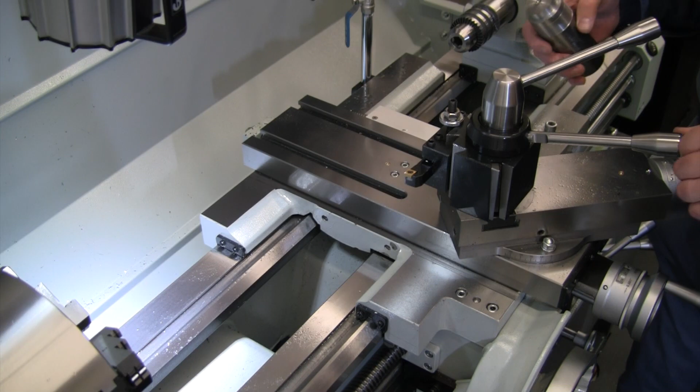All right, let's head over to the lathe and let's get digging into this project. So first off, let's take a look at where this is going to go. If I set this right down here on the ways, that's going to get to any of the tools I have on my quick change tool post. I'm able to back this up far enough even if I have a tool on here the other way that sticks out a little bit, and I've got plenty of room to check the height just by moving my cross feed back and forth.

And for boring bars, they're going to be over the other way, so if I move over this way with a boring bar, I'll be able to get in there and check the height on a boring bar as well. I know I've seen lots of different designs - some people put a bar across the carriage to set this anywhere in between, but I think I can get to everything I need by putting it down directly on those ways, which just eliminates one extra piece.

But as I mentioned, putting some hardened 4140 on and off of there, I don't want to do that. That's why we're going to go ahead and put an aluminum bottom on this. So it's actually going to be a piece of aluminum that's going on there, and it's 2-inch and it's hanging off the back there quite a bit - pretty good overhang.

So that's why we're going to cut a notch out so that it fits over top of the carriage and we get a little bit more surface area right on top of the way. So that is the overall design.

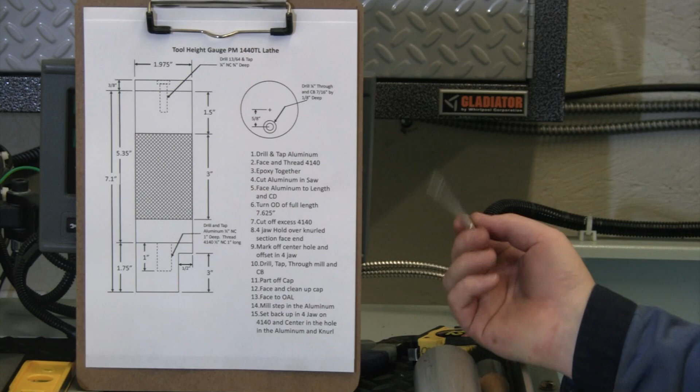Let me spin the camera around. Let's take a look at the drawing and talk through our order of operations and how I think this is going to come together. Alright, so here's a better look at the project and what we're going to put together.

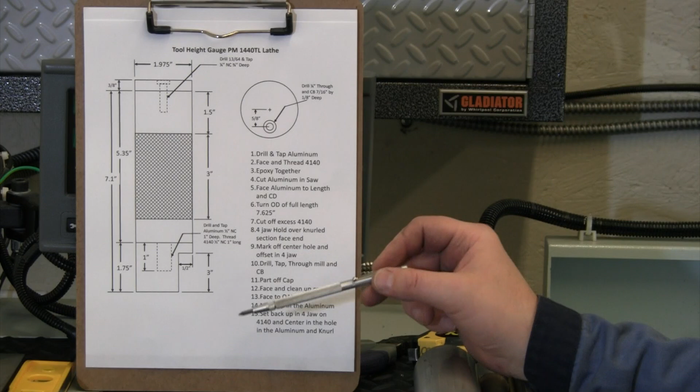I mentioned order of operations, and I did try to put together my order of operations for a couple of reasons. I didn't want to end up with a center drill mark in the top of my cap or the top of my piece, and I did not want to have to grab onto this knurl portion. Even with shims or anything else, it's still going to put some squish on your knurl and interfere with that, push that down. So I tried to make sure I had an order of operations where I wouldn't have to do those things, where I wouldn't be grabbing that knurl in the vise.

So I saved the knurling for last. I've got my center drill hole down here at the end. So here's what we're putting together.

We're basically taking a piece of this 4140, this 2-inch 4140. That's what's going to take up our main body and make the cap. We're going to marry that up with a piece of this 2-inch aluminum. So we're going to have a 1 3/4 inch piece of aluminum on the bottom here.

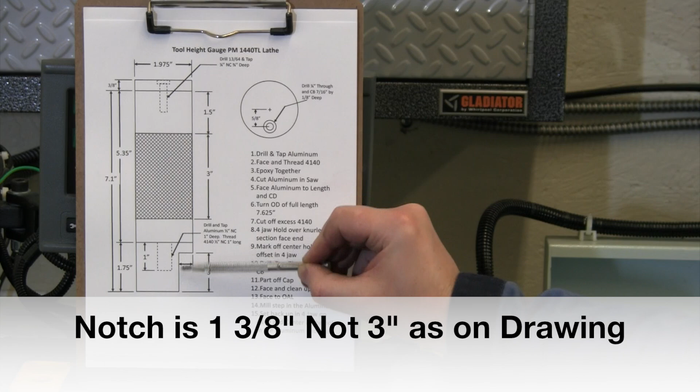We have to cut the notch out of that so that it fits around the carriage a little bit and sits nicely right there on the ways. Overall height on those two pieces should be right at about 7.1 inches. That's what I've roughly measured it.

Once I get this 3-jaw chuck off, but when we're transitioning to the 4-jaw, then I will put in the dead center into the headstock and we'll take a more accurate reading and make sure that we have the exact measurement on that one.

So what we're going to do is drill and tap this piece of aluminum, 1/2 inch coarse. I'm actually just going to turn it down on the 4140 and thread that for the 1/2 inch to go together. But I'm going to epoxy these pieces together solid. So this is not going to be height adjustable.

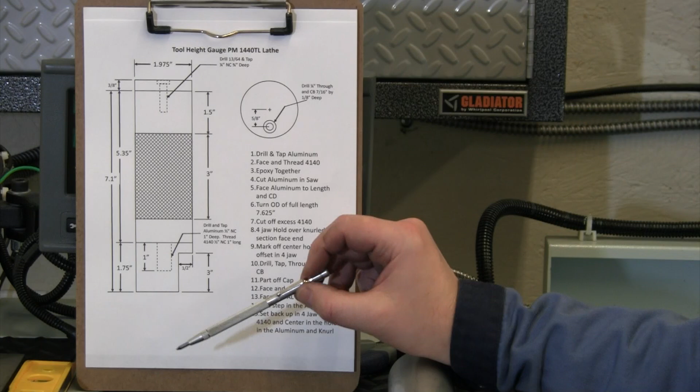I've seen some other ones where they are height adjustable. I plan to only use this on this lathe, so it's not going to be height adjustable here. It's a one-shot deal. We're going to need to make sure we face it to the correct length the first time, or we'll be getting creative with putting a spacer or something on it if we mess that part up. So hopefully we don't do that, hopefully we get it right the first time around.

So we'll go through an order. We're going to drill and tap the piece of aluminum. We're going to face and turn down the thread on this piece of 4140. It's kind of a long piece. Then we're going to lock these two together and epoxy them together.

Once that epoxy has set, then we will cut this piece of aluminum in the saw. We'll cut off most of that. We will face that and center drill it. Then we're going to pull it all out of the chuck, and we're going to turn the full OD on this. So that's going to be turning the OD of the aluminum, the 4140 body, and the cap, and the material we're going to need in there to part it off and clean all that up.

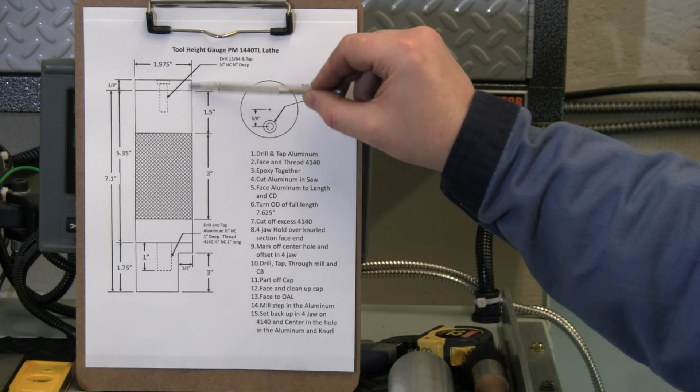So that's going to be a total of 7 5/8 we're going to turn for the OD. Then we will go out in the saw. We'll cut off the excess 4140 that we were holding on to turn that.

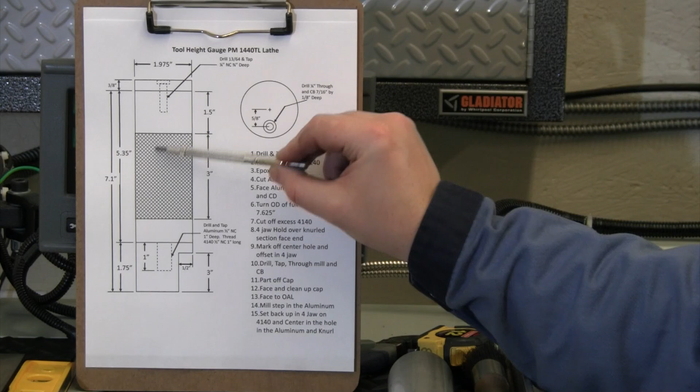At that point, we're going to grab it in our four-jaw, and we're going to grab in this area that we're going to knurl right here, because then we don't even need to use shims. Any marks we put on there, the knurling should take care of that afterwards. So we'll grab that in the four-jaw, and we're going to face off this end.

And then we're going to mark that off-center hole, which is this one right here. This is where we're going to get kind of fun. We're going to use the four-jaw, we're going to dial that in, and we're going to use a dead center to hold into our punch mark to dial that, to get that accurately offset.

And then we're going to drill that, tap it, use a couple of end mills to go in there and put the through 1/4 inch hole, and then put our 7/16 counter bore in that. So we'll get all those operations done on the cap, and then we will dial it back into zero again, and then we will part that off.

After we have that parted off, then we will face this to our accurate length, and we'll clean up the backside of this cap, and face that off. And at that point, then we will take it over to the mill.

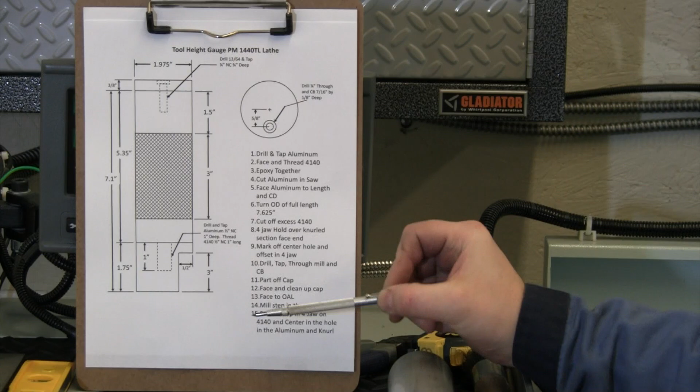So we still haven't knurled it yet. We can grab this whole piece in the mill. We'll mill out this notch down here, and then our last step, we'll bring it back to the lathe.

And we will use shims, then we'll be grabbing down here at this end. We will put some shims to make sure that we're not putting any marks on it. We've got our center drill down here, and then we will knurl that 3-inch piece in the middle.

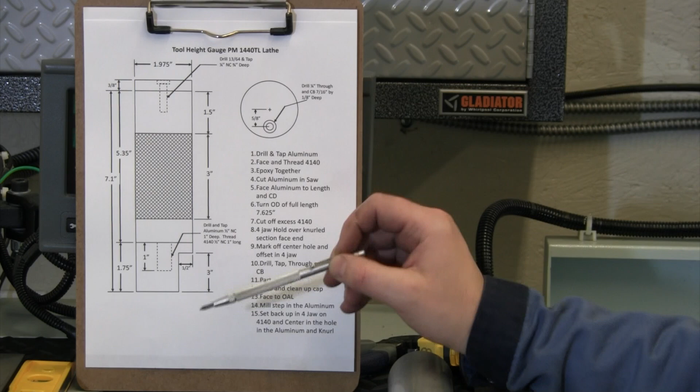I just have the knurling tool that came with my CXA tool set. I have put some new knurls on it, but still, it's not a quality knurling tool by any means. So if we don't have good luck knurling this the first time, if it doesn't look good, then hey, we're going to just machine that down, and it'll just be like a necked-in hourglass figure, like we did it on purpose, until we get a good looking knurl in there.

So that's the beauty, the fun part about making parts that don't have critical sizes to them is, if it doesn't turn out exactly perfect the first time, you get to add some artistic interpretation and make it look the way that you want to.

So really the only critical size we need to hit on this is the overall length, since it is a height adjustment gauge. We want to hit that. Most of these other dimensions on here, we're just going to make sure we get them looking good and looking the way we want to.

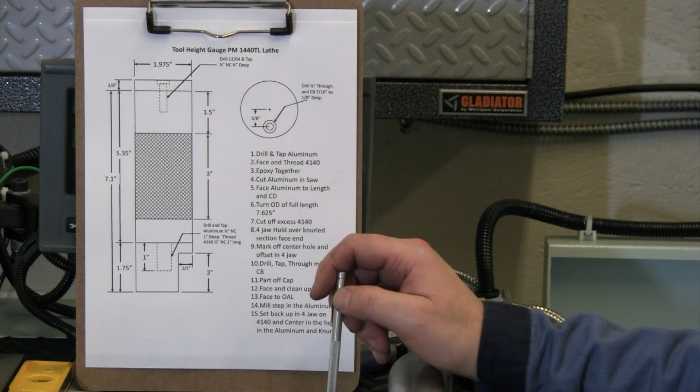So that's our overall order of operations, to make sure we minimize where our extra marks are and make sure we're taking care of the surface finishes. Just because it's a cosmetic part, that's really all it is, and we're going to try to make it look as good as we can.

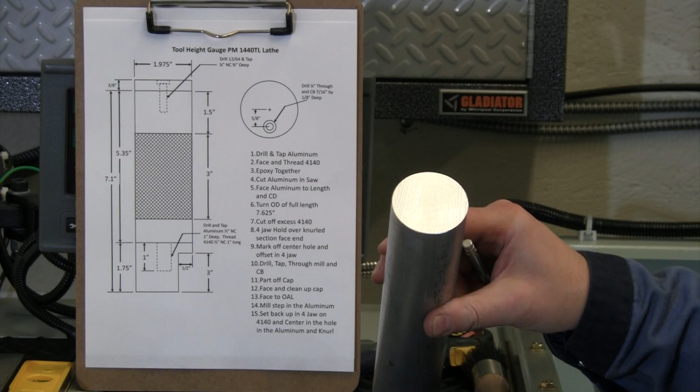So that's the thought. All right, let's go ahead and get lined up in the lathe, and let's get this piece of aluminum in there, and let's get this drilled and tapped for step number 1.

Alright, tap drill size for 1/2 inch coarse, 27/64. We'll get that pushed in there. We're going for 1 inch deep overall, so I'm going to go just a little more than 1 inch.

We'll probably end up not quite putting a full inch of thread on our other piece to get that together. We'll drill just a little over 1 inch deep, and we'll tap as deep as we can.

And here's my tap handle from Northern Machining Incorporated up in New Jersey. So it's nice, it's got a little cam lock on the back, so it self-centers your tap in there. And then after you get that centered, you still can tighten up your other pieces here to lock that in. And we've got a bearing on the back side of that.

So we're going to grab that bearing in our chuck, and that's going to allow me to spin the tap with both hands. It makes it a little bit easier to get in there and hand tap this hole.

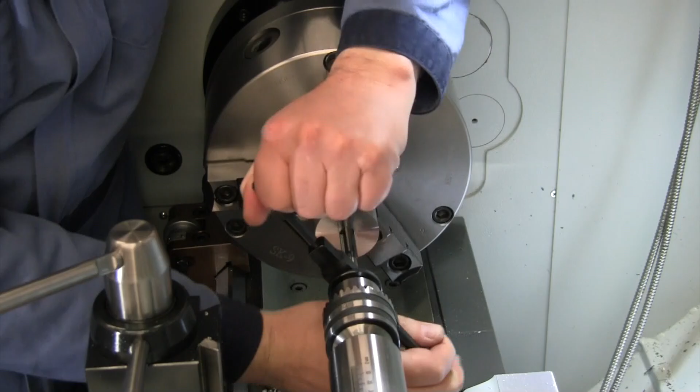Makes it really nice for hand tapping a hole. Alright, we're running into some chips in there. Pull it out, get some air on it, get it out of here, and we'll finish hand tapping it in the vise over there, because that's it.

That's all we're doing for this step, was we just needed to tap that hole. And we can run our tap back down there in the vise and just make sure we're in there as deep as we can. And then we're going to run some threaded rod in there to find out how deep we're going to have actual threads, and then we'll know how far to thread our other mating piece.

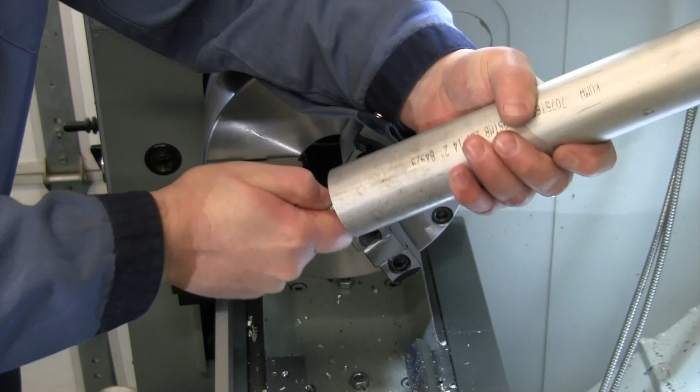Okay, I put it in the vise. I got an extra couple of turns out of the tap. So we got that cleaned out. I put some air to it. We've blown that out. Let's see how far we are getting our rod down in there.

All right, so right about where that ends. So that's our line right there. So we've only got about 3/4 of an inch of thread that we're gonna get down in there, unless we bevel our end on ours a little bit more. So we're looking at about 3/4 of an inch is what we can go for as we thread our other piece. We'll get our mating piece in here.

All right, we're turning this one at about 750 RPM on this 4140. We've got enough sticking out. We're gonna machine that back to 1/2 inch, go back 3/4 of an inch down to 1/2 inch diameter, and we're gonna cut our thread on there.

I know I cut one the other day. Originally, I was gonna use a piece of threaded rod between these two parts, so I was just gonna drill and tap this. But then I thought, what the heck, we can go ahead and do that. I know that I can turn up to a pretty tight shoulder. I'll get in there and notch out the back side of that a little bit to make sure our pieces go right together, but there's no need to use threaded rod, or we can cut a 1/2 inch thread on that. So let's knock that out.

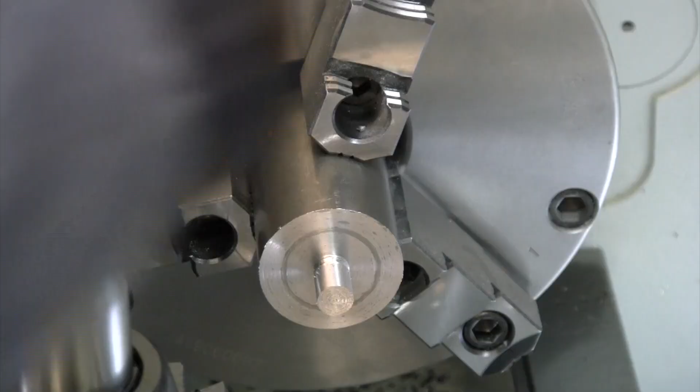Alright, so that's as close as I can get to get rid of that last little bit at the end of the shaft there before the thread. So we will just have to make sure we've got enough of a bevel on our piece of aluminum that it's going to go in there and go right up flush all the way in there.

Alright, let's get this set up to thread 13 threads per inch. I'm going to spin that at 130 RPM, and we're going to stop in that little groove right there. 13 threads, we're going almost right at 100 thou deep, and on my outside diameter, this is pretty much cooled down now. We should be just 2 or 3 under. We're only 1 under. It's all right, we'll hit it with some emery cloth as we get some threads on there. Or I'll just knock that down with the emery cloth a little bit right now, and then we'll get that threaded.

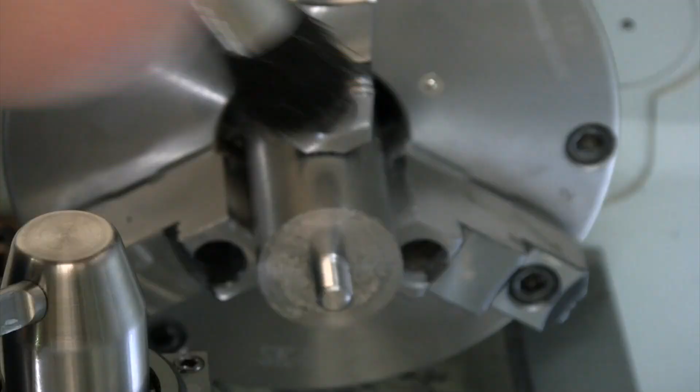Nice snug fit, that's what we're looking for. Let's make sure this is going to fit together for us and spin all the way up there flush. And yes, we are on there tight and flush. Alright, let's get these out of here.

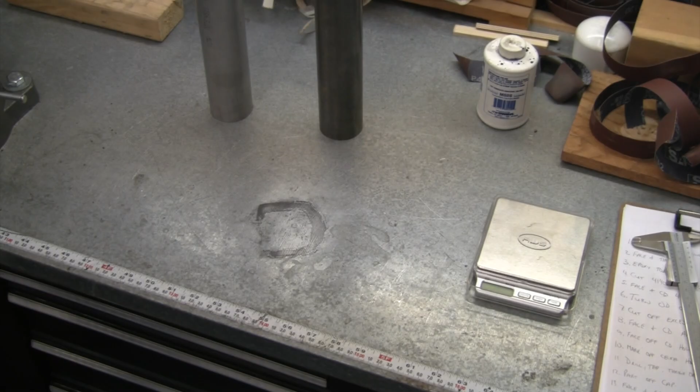Let's get some epoxy mixed up. We'll get some acetone on these, get these all cleaned up, and let's get these two parts epoxied together. I could probably just use Loctite on this, but hey, I want something permanent. I do not want these pieces coming apart. So we're going to go ahead and mix up some epoxy. This is 24-hour epoxy, so this will be the last thing we do tonight.

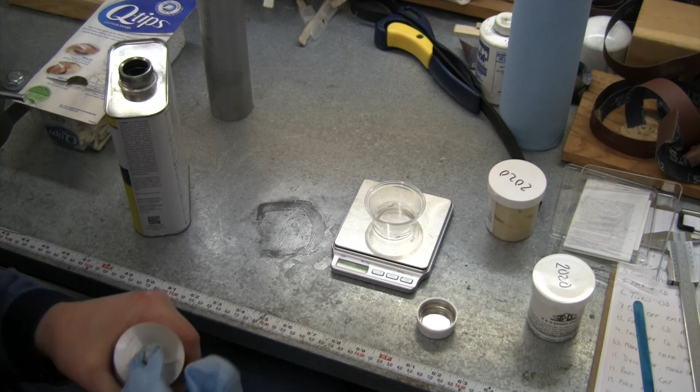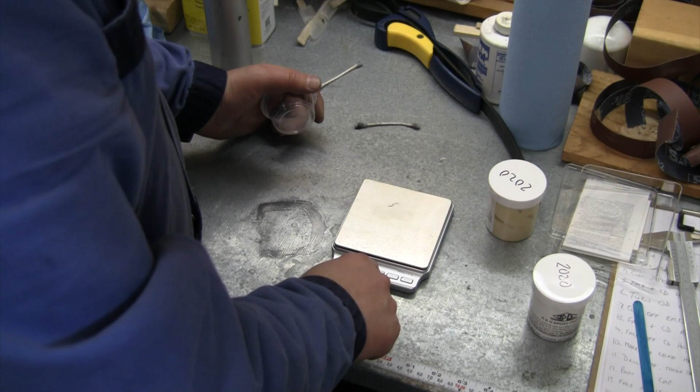But first, let's get our parts cleaned with some acetone. Make sure we have all of our cutting oil, everything off of these parts. There we go, our part should be nice and clean, and by the time we get our epoxy mixed up, all that acetone will have evaporated out of there. So I'm going to get one part mounted in the vise here, and let's get our epoxy mixed up. Again, I do epoxy by weight, that way you're not trying to eyeball mixing up your two parts, just a lot easier to do it that way.

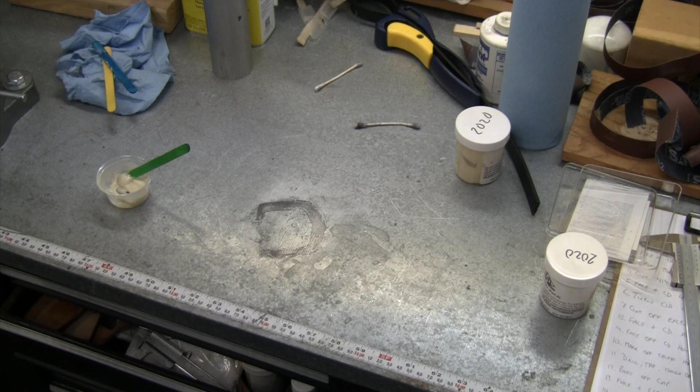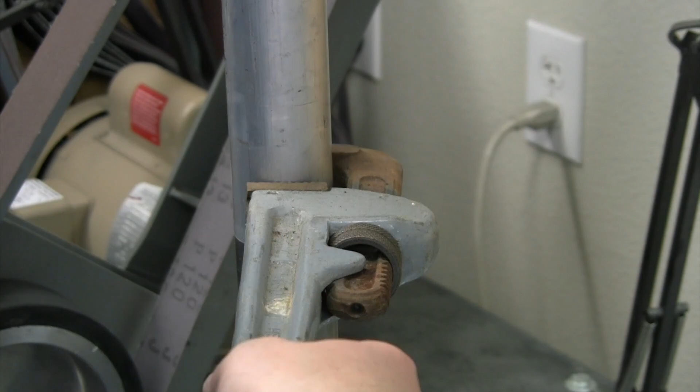Alright, let me get the camera turned around, let's get this epoxied together. There, we got that nice and tight there now. Let that cure till tomorrow. We'll come back and we will get to work on our next step. That's it for tonight. We'll see you tomorrow.

Alright, our piece is epoxied together, and that is ready to get machined, cleaned up. So now next step, we're going to take this out to the saw. We're going to cut this down to length. Grab a hold of this in the lathe, face this end off, get that to pretty much our 1 3/4 inch length, as well as we can measure it up to that shoulder. So we'll get that faced off, and then we'll center drill it, and then once we have that done, we'll take it out, and then we're going to cut off our other end here to length. We need to make sure we're leaving all the length that we need on that.

We'll get that cut off, and then we're going to get that back in the lathe. We'll face that off enough to clean it up. We'll mark our off-center bore, and we'll start working through the steps that way. Let's get this in the saw, get it cut off, faced off in the lathe, and then we'll pick up on the next step.

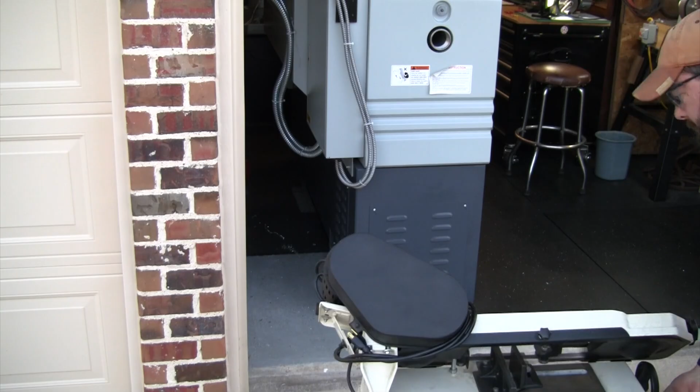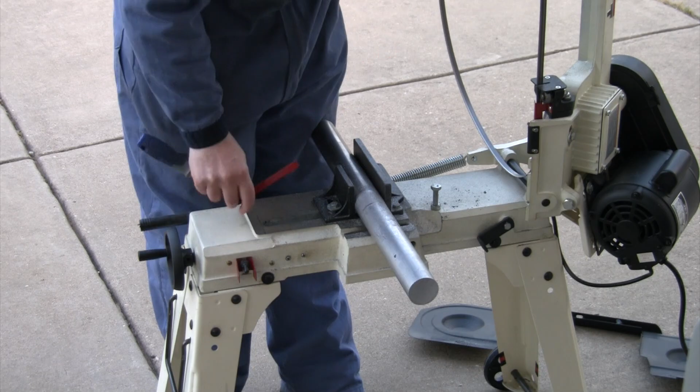Yeah, when it's taking an hour to cut aluminum, it's time to change the blade. Look at that sucker go now.

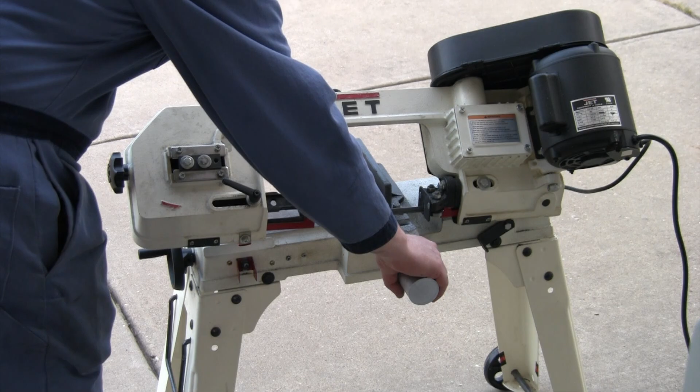Alright, we're looking at almost 93 thou to come off of there. Let's get that faced off and then we'll check. Also, it's a good thing we write down our order of operations, because we're going to face this off and then turn the OD on the whole length. So we got to do all that before we turn it around and cut that 4140 to length. So face this off, center drill it, and then we're going to pull that out and turn down our full 7.5 inches or so that we're going to need total. And then we'll pull it out and start working on that cap end after that.

So about 45 thou to go. It cuts nice on a heavy cut, so we're just going to take all of that at one time. The overall length was where it's going to be critical. Getting this, the 1 3/4 was just kind of a made up size, so that'll be perfect. Now we'll get that center drilled.

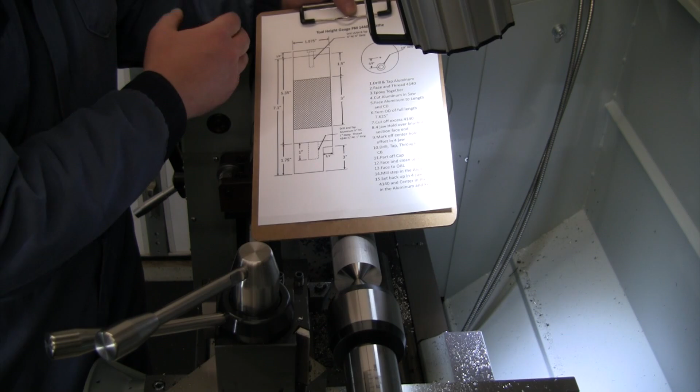Okay, we're turning 7 5/8, somewhere right around there. The reason we're going 7 5/8 is because we have our 1 3/4 here. Let's get our picture. We've got the 1 3/4 for the aluminum, we've got 5.35 for our finished 4140, we've got the 3/8 on top, and we're going to have to part that off right there to separate the cap, and we need a little bit of room at the end to face it off. So that's why we're going with our 7.1 plus 3/8 plus 1/8 of an inch to part plus a little bit of room. So that's where I came up with the 7 5/8, just to make sure we have enough, so we don't run out of material.

So that's our 7 5/8. So we're going to turn that back. Again, we're not hitting a specific size. It's currently 2 inches. I think if I take a 30 thou cut off of there, that's going to be enough to get a decent finish on this at a good speed. Got a pretty decent rate of feed, so I just want to take one pass off of that so it cleans up nicely and we get a good finish. I think that's a pretty fresh insert on there still. So that's the goal: take one 30 thou pass, clean everything up, get a nice finish, and then we are ready to move on to our next step.

So I'm going to turn this at, normally I'm turning this at 750 for this 2-inch 4140, but since I'm only taking one cut at 30 thou, a little lighter than normal, I'm going to go ahead and turn it at 900. Should be a good compromise between the aluminum and the 4140, and I'm feeding at 7 thou per revolution, so with that fresh insert on there, that should give me a nice decent finish. That's the goal. Let's give her a shot.

That gave us a nice respectable finish across there. We're going to put a knurl for that 3-inch chunk in the middle, so that's going to change that up some too, but yes, that looks good. Let's put a bevel on there and let's get this out of here. I think that turned out all right. Looks kind of cool, that transition from the aluminum there to the 4140. That should be a good looking part when we're done.

Alright, let's get this back out in the bandsaw and let's cut off the rest of that 4140. Now that we've got a nice sharp blade on that bandsaw, should make short work of getting rid of that, so that should be good.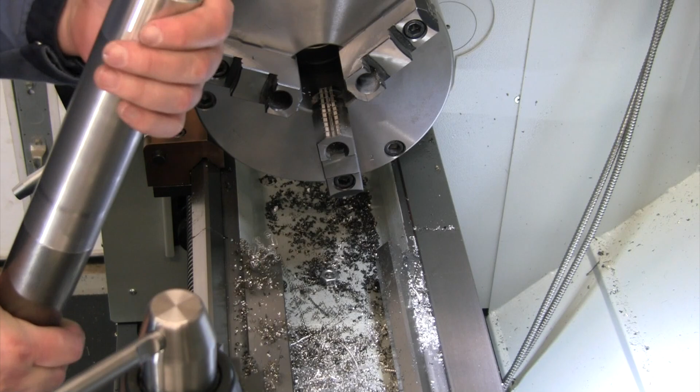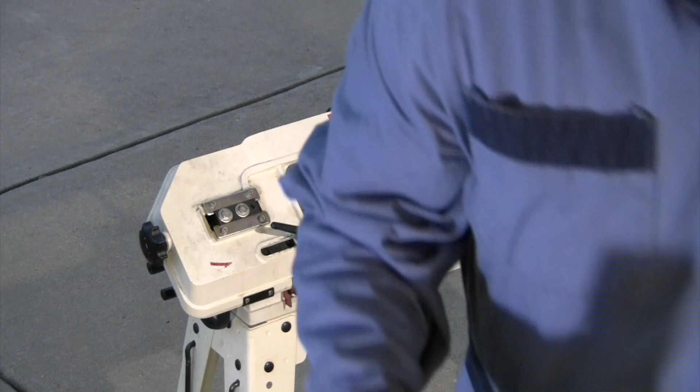There it is. Alright, let's get this cleaned up a little bit. Get that 3-jaw chuck off of there. Let's get a good measurement of exactly where our center line is off of these ways. So we'll get a good measurement off of that with putting in our adapter sleeve and put in a dead center. And then we'll get our 4-jaw on and we can continue on with this process of making our cover plate and get that parted off.

Well, there we go. That's going to give us our accurate height measurement. I'm not going to be able to measure down to the ways, of course. My plan is I'm going to lock in one of these big flat carbides, get this lined up on center, then come over with my vernier and measure down, and that'll be what we go with. A dial across some measuring blocks would probably get me closer, but for what we're looking for here, this will accomplish it.

All right, I'm liking that. I am getting right at 180 millimeters. I'm sure 180 millimeters is what it is.

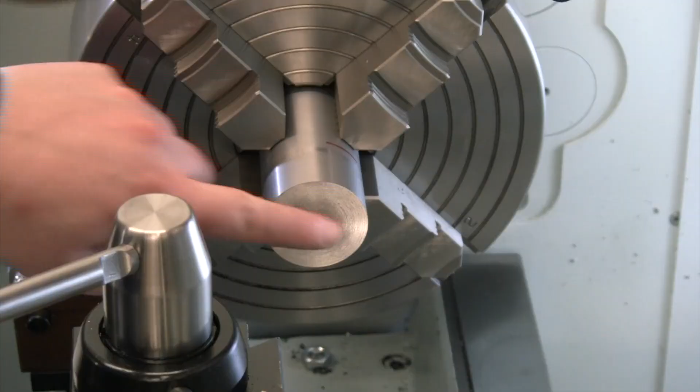Rub a little emery on that. That's going to be our finished top of the cap once we're done. There we go, now all that dialing just to take that one little cut. Now we're going to pull that out of there and we are going to barely take that edge off of that as well, so we'll be measuring out to that.

All right, so we're going to pull that back out and mark our offset hole. We're coming 5/8 off the center, so we just need to be 5/8 off that center line. Then we're going to dial in that hole using a dead center, and we'll come back and do that here in a minute. We're going to dial this offset so that we can drill, tap, and counterbore that hole all through both pieces. Then we'll come back, dial it back in, and part that piece off. We should have a cap that's going to match up and fit nicely on there when it's all done. And then we'll do our precision cut, which is facing that to length.

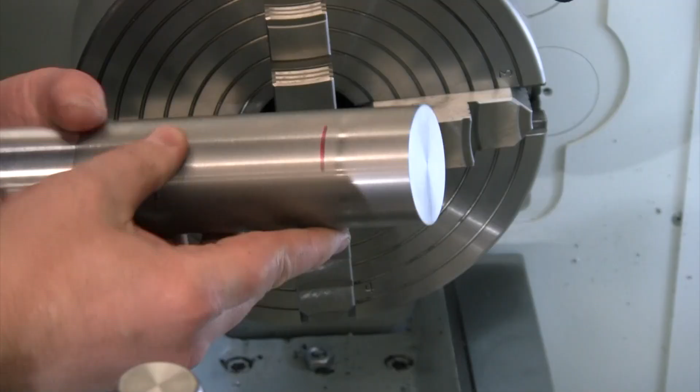So let's get this back out of here and get our hole marked. Yeah, not too bad for jaw marks at all. Definitely our knurling is going to get rid of anything we do there, so that'll be fine. All right, let's go over to the bench and mark our hole on here.

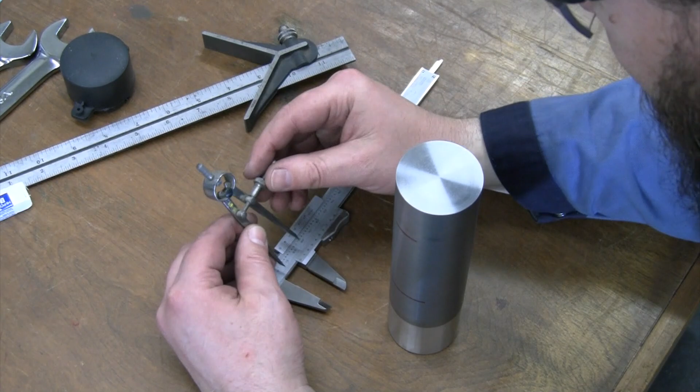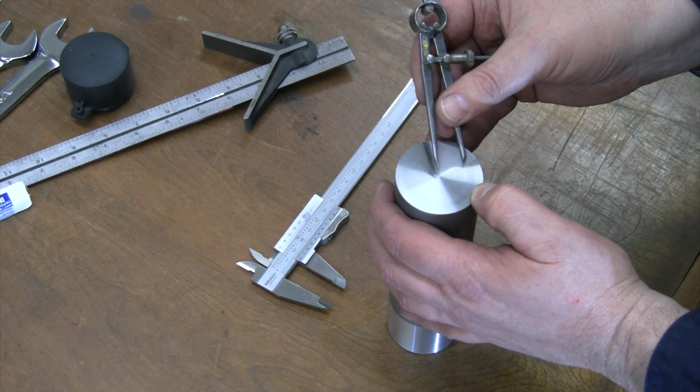All right, I want to measure, making sure I'm measuring more or less a straight line. It's only one hole, so we shouldn't be able to get too far off track here. I'm going to set these for 5/8, and I'm going to use those to set my dividers. We're going to measure off of that center mark right there, and yes, I can see my mark right there. There we go, see it better if I do it that way. Perfect, love this bullseye center punch from Grizzly.

And there we have our punch mark in there. Double check that. Yes, there we go, right back to the center. So we're 5/8 off center. Now we're going to go dial that in on the lathe and get that drilled.

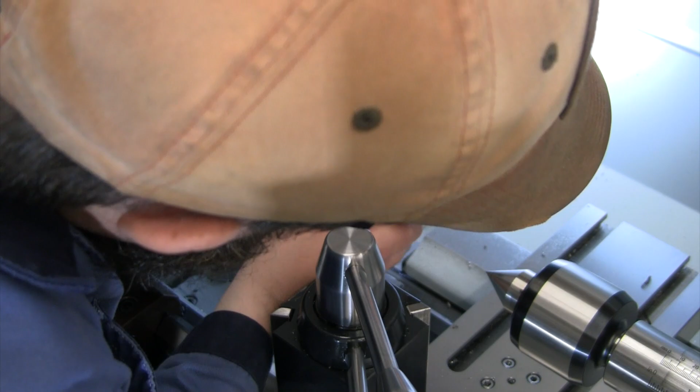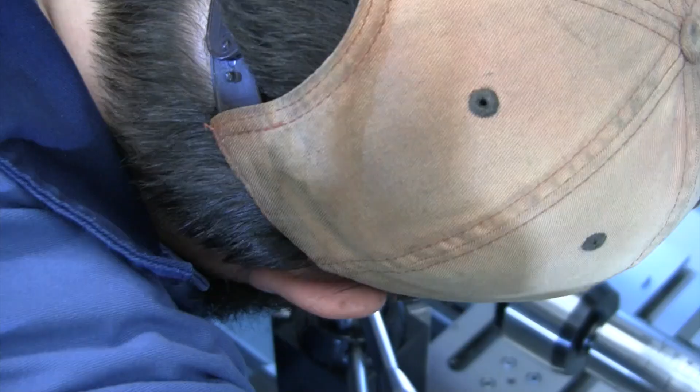All right, well first we're going to try and make things a little bit easy for ourselves in that we are going to back one of these jaws off, 125 thou. And that'll give us our... except I need to go 625 thou, so I'm not sure what I was thinking there. It's 625, it should give us a reasonable starting point. So I need to line up my piece 180 to that. Now I'm so spoiled on this lathe with everything going straight through the spindle that I was kind of thinking that was going to happen. I was forgetting that once this is offset, I'm not going to be able to make it through the spindle anymore, so that's not going to happen, which means we're going to want to put some shims in there so we don't mark up our aluminum all over the place here.

All right, let's kind of hold that there while I put some shims under it, and then we'll see where we are. Well, let's see how this is going to work.

All right, we're within a couple thou there. Let's see how we are doing for having it straight in the chuck. We're actually only off by maybe just right around 2 thou. Let me grab a brass punch here. That moved a little bit that time. All right, we're off about 1 thou. I think that is going to be fine. Let's finish getting this dialed in for us here.

Okay, sometimes you just gotta say good enough. We're drilling a hole and tapping it. We're 2 thou on run out, 2 thou for being straight. Actually, we're only about 1.5 thou or so on run out. I think that is close enough for our drilled and tapped hole.

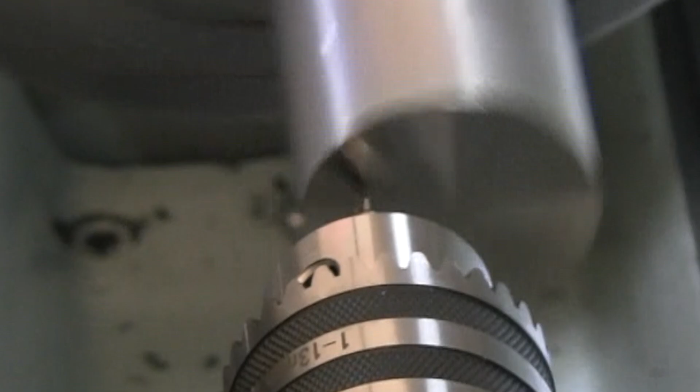So let's go ahead and get that done. Let's see how it looks when we turn it on. All right, we're gonna turn it relatively slow here, so 250 RPM. And our center spot is turning right where we want it. That is almost hard to look at, you know, but that's all right. That is working. Get our hole drilled in there.

All right, so we're going to drill our tap drill size in there first. And since this got a little long for our cap and everything, let's figure out how deep we need to drill in here. So I'm going to end up at 7.1, and I want to be drilled and tapped in there 3/4 of an inch from there.

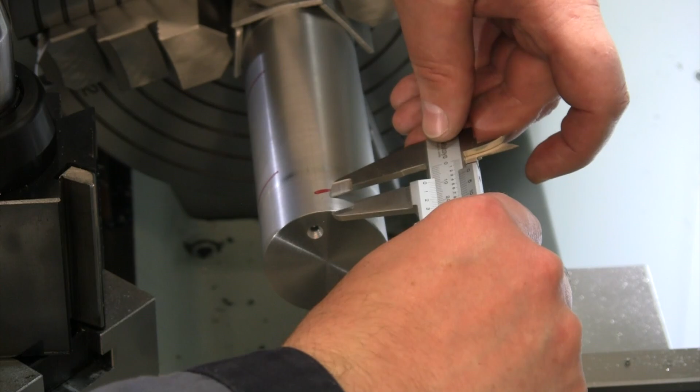I'm not going to have too much to face off of there, that's for sure. Well, I guess there's a lot more there than I think. I'm only going for 375 for the cap. So yes, I'm going for 375. So we're going to face some off of that, and that's still going to leave us with enough to part and enough to face off when we're done. So, okay, we have plenty of material.

We're doing fine there. Bevel off those marks I made with my brass hammer there. All right, so from here, if I want to be 3/4 of an inch deep, I need to drill in roughly. I want to be able to tap 3/4, so we're in about 1.5 inches.

Whew, that is interesting watching that go around. All right, now I need that to be all the way through 1/4 of an inch, or I need it to be 1/4 of an inch hole all the way through the full 3/8 deep.

All right, we've got room, so I'm going to do everything that I do here. I'm going to go an extra 50 thou, because then I'm going to be able to take 50 thou off of the end here, get rid of any of the marks that I made. So I need to go in 3/8 plus another 50, and I can go a little extra because it's just where it's going to get parted off.

All right, so there's 425 deep with my 1/4 inch. Then I need to counterbore that 7/16 of an inch. I'm going 1/8 deep with this. I need to go that extra 50, so I'm going to go 175.

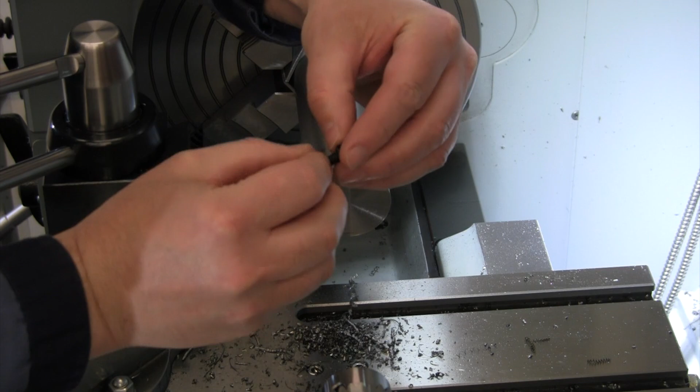I would say that worked all right for you. Every once in a while you just get lucky in that we made this a little over 1/8 of an inch deep, and it is actually supposed to be 1/4 of an inch deep. So 1/8 of an inch is only the head of this screw, and when you put the head and the washer together, it's 1/4 of an inch deep. I wrote that down wrong on my drawing, just measuring the head. Thankfully I hadn't taken this out of here last night, so it slept on it and it's still in here and set up.

So we're going to go ahead and punch that another 1/8 of an inch deeper. Now that we know a little extra feed on that end mill, it doesn't want to chatter, it cuts pretty decent, we should be able to do that fairly quickly. So we're going to do that.

Also, before we take this out of here, just thinking about the setup and why we were having such a challenge dialing that in with that dead center. If you look in here at how this is set up on the chuck, we've got two of these jaws so far down on the back side of our piece that it really just didn't want to move over. So just a little bit more complicated than normally dialing in a 4-jaw chuck, and I really had to loosen these two off in order to get it to move and get it lined up across, in this case, jaws 1 and 3, a lot better.

And then even as I tightened 2 and 4, it wanted to sort of push it that way a little bit. So this much offset gives a little bit of different challenges, but other than that, it really dialed in exactly the same as any other time dialing in the 4-jaw. And we still got it within 2 thou and 2 thou across the length, so for the hole that we're making, still plenty accurate on there. Kind of a fun way to dial something in.

So if you ever need to make an off-center bore, anything sort of cam related, using that dead center like that is a great way to dial that in.

All right, well, let's get this turned back on. Let's punch that counterbore in there 1/8 of an inch deeper, and then we are going to move this back, face that, part this off, clean up our end a little bit, pull it out, measure it, get it in there, and get it totally faced to length. We'll be ready to mill our notch on the end, and we are getting close to wrapping this up. Let's keep moving through our steps.

Yeah, we're a little deeper than we needed to be. But we're going to face some off of that when we turn this around, get rid of that mark we made. So we'll get that faced back to 1/4 of an inch deep. And then we'll get that parted off.

Shims worked well. Not a mark on it. All right, let's get it pushed back in where it's going to be on top of our knurl marks.

That is good enough to face this off. All right, we're going to face this off at a nice fast feed, try and get a good finish on there. And we're taking 50 thou. I'm going to take that all in one cut, nice heavy cut, seems to clean up a little better on this. So let's take all of that at once. Yes, even across that hole. That nice heavy feed gave us a good finish there.

Okay, let's put a nice bevel on that. That's got that looking pretty.

0.375 plus 0.086, we're going 461. I'm going to leave myself a little bit so we can face about 20 thou off the back side of this. We're going to grab that and make sure we clean that up a little bit as well. That should give me enough to face that off right there. Now we're going to be facing through that hole, so it's going to go a little clunky on us, but I think it should still face off just fine.

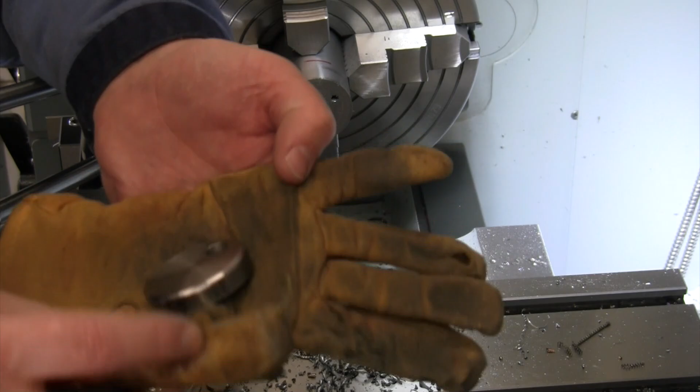Well, we'll get that back in there in a minute, face that off and clean it up, but there is our nice looking cap—counterbored, drilled through, ready for the screw to go in. We just need to clean up the backside a little bit.

All right, let's measure our length on this. I'm going to go get my calipers. We'll measure the length and then come back and face this off to our finished length of 7.087 inches, 180 millimeters.

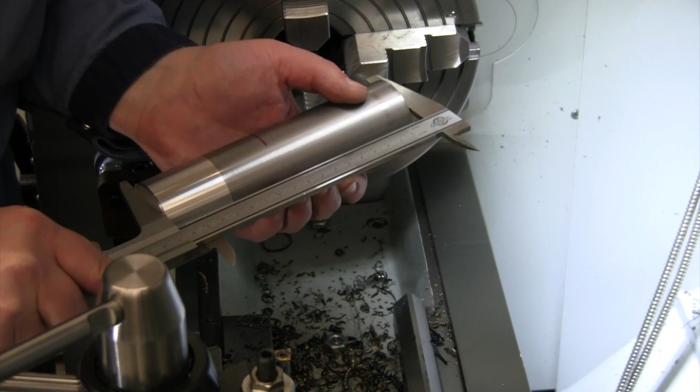We are almost exactly 1 millimeter long, so we're going to calculate exactly what a millimeter is. On the inch vernier, let me get the light over here so I can really see. On the metric side, I'm right at 181 millimeters, and on the inch side I'm at about 7.124.

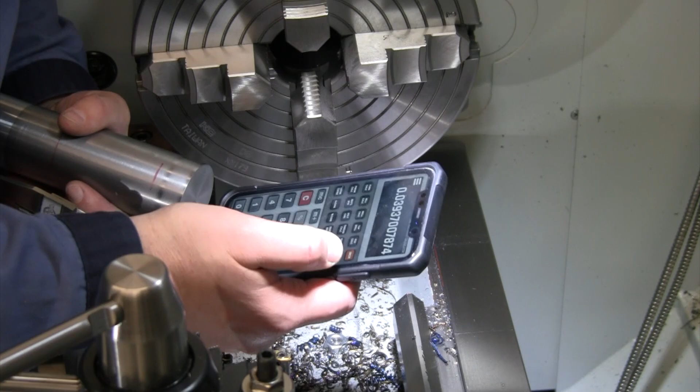Let's see what 1 millimeter calculates out to: 0.039. And if I'm at 0.124 minus 0.087, that's 37 thou, and 1 millimeter in inches is 39. So that's within 2 thou. One reading tells us we need to take off 39 thou, the other says 37. We're going to split the difference on what I'm getting off those two scales on the caliper, and take 38 thousandths of an inch off this, and we'll be done.

Yeah, we didn't leave a whole lot of extra to spare, did we? Not a whole lot. All right, well that's good. Let's get this in here, we'll take off our 38 thou, doing that in one nice heavy cut to try to get a good finish on it, and we'll be ready to take it over to the mill. Then we'll bring it back over here just to get it knurled.

We're doing this one-shot deal. I did one touch off, zeroed it, and now I'm just making sure that's good. Right now I'm at 1 thou and still not touching, so I know I'm within 1 thou. Perfect. All right, I got within 2 tenths, and when I got within 2 tenths, I was just barely touching. So now I know I've got a nice, good touch off.

We're going to go our 38 thou in and take our cut, and we'll have this set to length, and that'll be our part done and ready to go. We're just barely going to break the edge on this, because this is what we're lining up our tool bit to, so we don't want to put a big heavy bevel on it—that would make it harder to line up with our tool. So I'm just barely going to touch it with some emery cloth, make sure there's nothing sharp, but not put a big bevel on this one.

That cap's going to be on there to keep that covered up. And there we go. All right, I'm going to be grabbing onto this end when we knurl it, so I'm going to go ahead and polish that up a little bit right now while we've got it here. And that should be it. We'll head over to the mill and get that step cut in there, but first we'll get this cap machined off on the backside and get it finished up and ready.

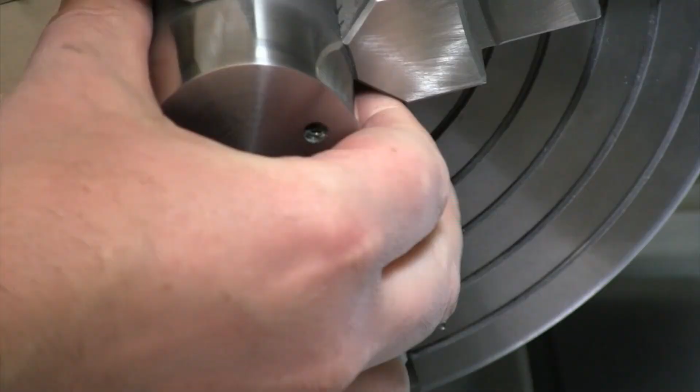Great tool for the job here.

Alright, well a little bit of it's the rough surface from our parting tool, so we'll call that good. All right, same thing, we're going to take about 25 thou off this. Let's clean that up a little bit. And just like the other one, we're just going to break that corner with some emery cloth, and we'll leave that a nice sharp edge to go up against checking our tools.

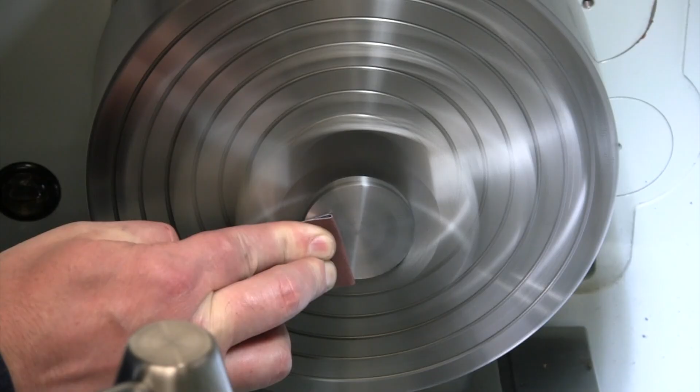And there we go, that is done—deburred, drilled, counterbored. The screw head is going to drop down in there nicely. We'll get that onto our other piece. Just give it a quick rub, just to barely see a little bit of jaw marks in there. We can rub those out a little bit by hand, I think, and we'll have those all set.

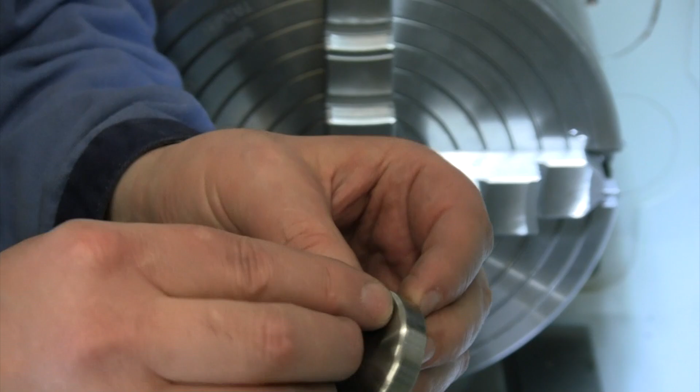Something we want to think about before going over to the mill: when this is notched out, I want the cap to swing from over here so that when I'm on this side I've got good access to the edge of my piece with the cap swung out of the way. If I've got a boring bar, I can get over here, and if I'm coming in from this side, I can get over here. So when we put this in the mill, we want it oriented that way, which means we're looking to get rid of material right here. That's going to be set up in the mill, right at 90 degrees, is where we want to try to get that hole set up. So make sure we make note of that.

We also need to finish tapping this hole down in there the rest of the way. So let's go over to the vise and finish tapping that really quick before we put this in the mill.

Gonna be close. Let's see if that got us in there far enough. We may have to shorten this screw a little bit, but between the washer and that, we'll see if it gave us enough. Let me blow some chips out of here and we'll make sure we bottom that out.

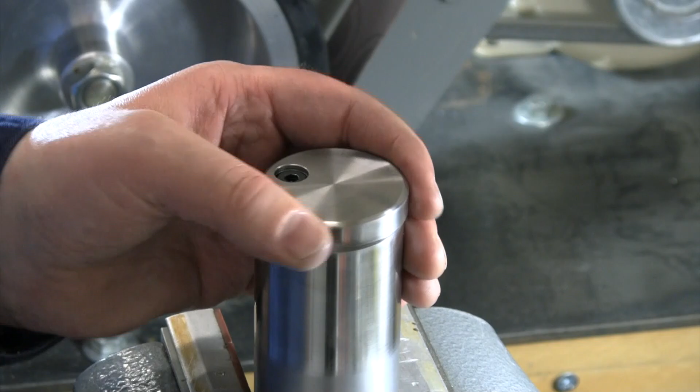There we go, they're machined together, so a beautiful fit on there. I've got a lock washer in there, so just enough to put a little bit of pressure on that - a really nice friction fit to spin it out of the way. We'll use that as our height gauge. I'm happy with that. Counter bore complete, lined up. Let's get this in the mill and get our flat cut on here.

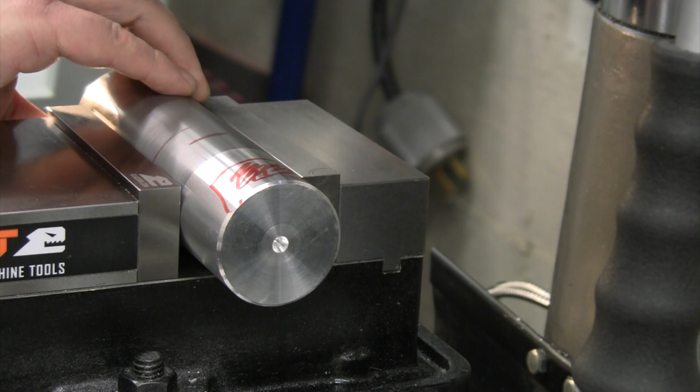All right, so we've got our red part marked off there where we want to cut. I want to get this hole on the backside here as close to 90 degrees as I can, so I'm going to put my level across the middle of the hole, middle of the piece. I think that's pretty good.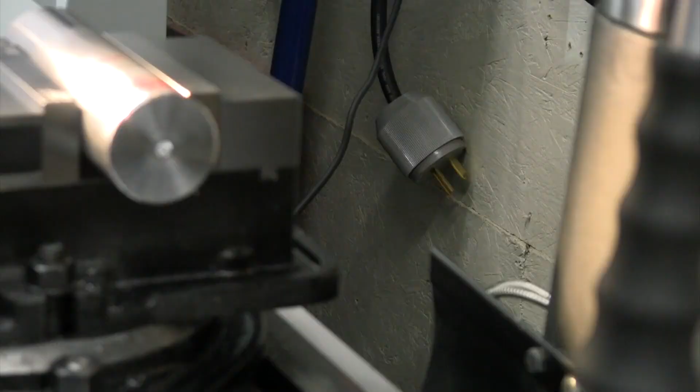I'm going to use a 5/8 insert indexible end mill to rough that out. We're going to go 1/2 inch deep and 1 3/8 of an inch back, roughing to within about 5 thou at the bottom and about 5 thou on the back. Then I'll change it out to a 3/8 end mill and go in and clean all that off to make it look nice and shiny and pretty. This is a Glacern Machine Tools indexible end mill - you can probably see I've got their vise on here too, but I've been very happy with some of their tooling. Really does a nice job.

All right, we're touched off there, so that's where we're going to start our 1/2 inch deep from. We'll do 2 cuts of 250 thou each. There's 250, let's touch off on the end so we'll know where we're going for our 1 3/8.

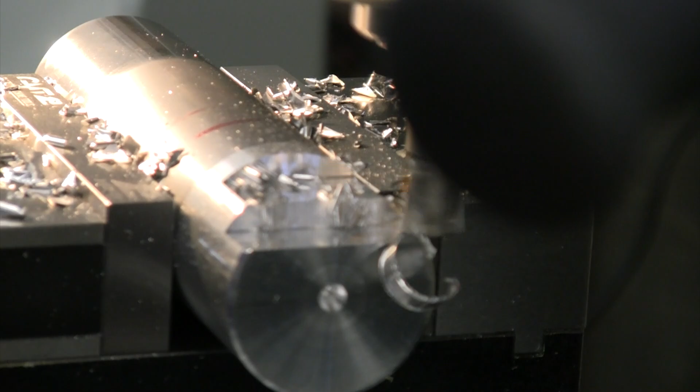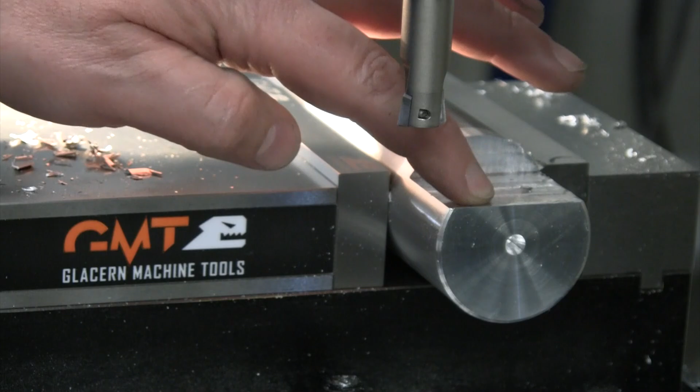Well, I think my handle got in the way on that last cut, might have cut some of it off. It's all right, we got that roughed out, you can see there's just a little bit of a step back there. So I'm going to put a 3/8 end mill on there and we'll go in and just take a skim - about 5 thou off the bottom and 5 thou off the back, just clean all of that up in there.

I'm going to go in there and touch off on depth. Because this end mill is 3/8 and my other one was 5/8, I just need to adjust it by 1/8 of an inch, and I should end up right back on my start point again. If I come over here to 125 and re-zero that, now I should be right flush on the end of this again. And if I spin that - yeah, I've got a little burr turned up on it, but yes, I spin that and I'm lined up right on the end. So now I know where to measure off for my 1 3/8 of an inch deep.

We'll touch off on the bottom, set a cut for about 5 thou deep, and then start working our way over in 350 thou increments, working our way across until we get right to our 1 3/8 depth back there. It's only a 5 thou cut, so I'm just going to cut it both ways coming across - not moving any backlash or anything for climb milling versus conventional milling, so we'll cut both directions. I'm actually going to start with a climb mill to try to get rid of this burr off the front edge, then go back and forth and zigzag our way across there.

And there it is, turned out nice. We got rid of that little step on the backside from that roughing end mill, and it worked out perfect. That last step was only 25 thou difference, so it looks like it steps over perfectly. We do have a burr on the front, so we'll just barely touch that with a file and clean it up.

Before we get this set up to knurl, let's see how we're looking so far. There's our step, we've got our flat on there, and that fits up nicely onto our ways. This is the tool bit we had out that we used to set this up. Let's see how we're coming across there. That's feeling very nice, looking good. I think what we designed is operational and that's working. We'll put our cap on there after.

We never did come back with our vernier caliper to double check our size. If I put that across there, yeah, that comes out looking right at 180 millimeters. As close as we can eyeball that on a vernier without an 8-inch mic to check it, that is what we were looking to create. So I'm happy with that, that's going to work.

Alright, let's get this set up for our knurling. We'll get this all dialed in first, and then we're going to knurl. This is just a really cheap knurling tool that came with my AXA tool set, though I do have some different rollers for it. Maybe making a better knurling tool needs to go on my to-make list one day, but for right now this is what we've got. Hopefully we can get a good knurl out of it.

We'll go ahead and get this set up square to start with. We don't have anything in the chuck, so we can get over there and make sure I've got this on nice and square. That is on there nice and square, so that's good. Alright, let's get that out of our way until we get this dialed up.

I think that is good. Alright, I've got that dialed in and centered up. I tend to knurl at a pretty slow speed, so we're going to spin this at 130 RPM and feed it at about 11 thou per revolution. So let's get our marks all the way around and make sure we can see those.

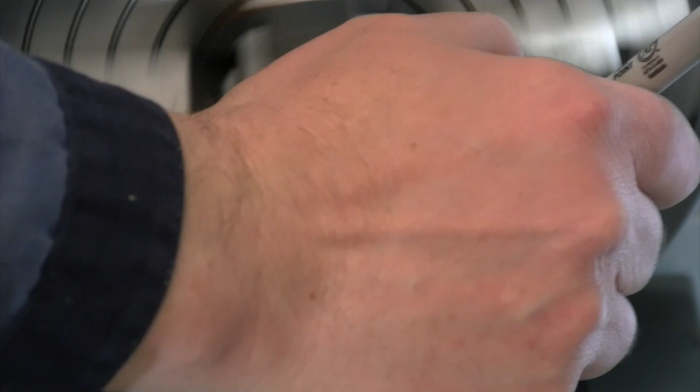My technique for knurling is to push it in there lightly and spin it by hand, trying to get enough pressure for the pattern to jump into its own groove. Once it gets into its own groove on a full revolution, you can continue to push and it'll stay within that groove, basically picking up its own pitch on the way around. If you don't put enough pressure to get it to jump into its own groove, that's where you start to split the knurl, and once it splits and starts feeding, I don't know how to save it from that. So I try to push enough pressure to get it to jump into its own mark, and we'll see what we can do.

So I've got this centered up, both wheels should hit at the same time. Once it gets cutting, I'm going to put a little bit of oil on there and we'll feed it across, push in a little more pressure, feed it back, and go a couple times until we get the depth we want. On this 4140, it's probably going to take a couple passes to really push that all the way up to a full knurl for us.

If I can't get it to not double knurl, if I can't get it to look good, then we'll take a skim, machine it down to a slightly different diameter, and we've got some flexibility. We can just keep playing with the knurl until we get it looking the way we want to. The goal is to get a good looking knurl, not have it be exactly at this diameter. We'll see if we can do it in one try, great. If not, we'll make a couple tries at it until we get a good looking knurl on here.

So it's looking pretty good. It's going to be a little bit light on that front end up on here. But let's get one more pass back and we'll get that just a little deeper. And it's just going to be a little bit off crooked on this one where my tool wants to turn a little. It's looking not bad.

Alright, that is a full knurl. Definitely what we're looking for there. So we didn't get a double knurl. Looks pretty good in most places except right there at the end.

So, trying not to totally mess it up, I'm going to try something here. I'm going to turn my tool post a notable angle in that way. Now I'm going to see if I can get those to engage just off the tip a little bit and see if I can't get this to pick up where it was there. Alright, I think that's cutting in the same spot. I'm going to see if I can get that to clean up the front of this knurl a little bit here, just using the toe of my tool to get that to clean up.

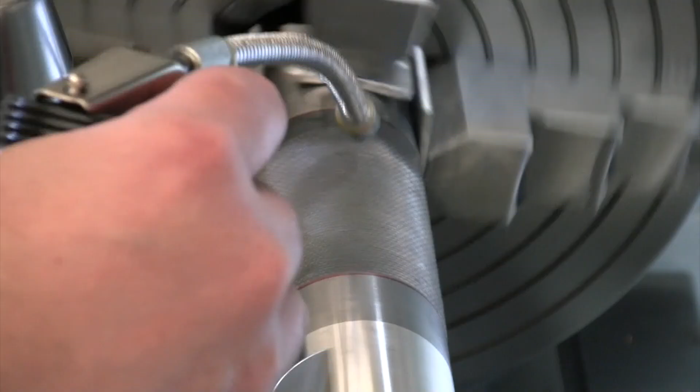It's looking awfully good. Just going to go a little bit deeper there to blend that in just a little more. And we'll just go one more pass forward and I think we've got it. That looks much better than where it was finished up before.

There, a little bit of acetone in there to really clean that out. And we will call that done. Knurl looked all right. Sometimes too much light's a bad thing.

No, that looks good. All right, I'm going to do one last thing. I'm going to go put just a little cut on each side or each end of those just to really make that knurl pop. So let me get my tool post squared up here again.

And I'm just going to go in here on each end of this knurl, and I'm just going to touch in here with a little bevel just to crisp up the ends of that a little bit. So I just want to go in there with this tool and right on the ends of my knurl, I'm just going to go in probably about 20 or 30 thou just to make a really nice end of that knurl. I think that'll really make it pop nice there.

My DRO turned on so that I can get the same depth on both sides. Just went in there 20 thou.

Alright, so 20 thou on this end left just a little bit of those lines that I'm trying to get rid of. So let me go in a little bit deeper to get rid of those. If I go in 40 thou, there's just a smidge of them. I think we can emery those out or get those to buff off of there a little bit. So let me go back to this other side and go in 40 thou on this one.

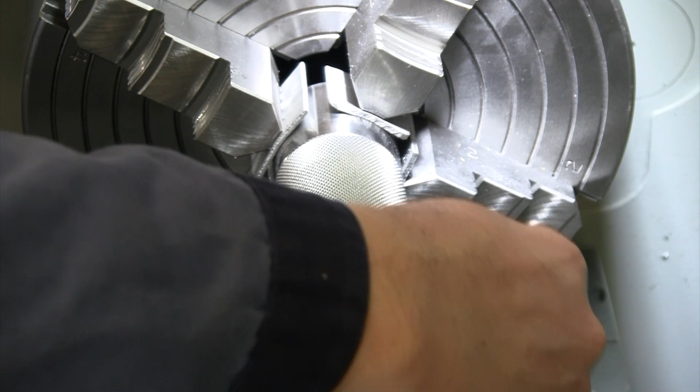I'm going to grab a little bit of emery and just touch that to try to get rid of that little line. That makes our knurl look a little more finished. And then we'll buff up this end a little bit too to make it match since we polished that end already. And we should be done.

And that is it. Alright, let's get this out of here. Get our cap screwed on. And that is another project complete.

Happy with how that turned out. Alright, let's get our cap put on there. And there it is, nice slide there with that lock washer. Good fit all around, good grip. Shouldn't have to drop that on the lathe. And we've got a nice soft bottom where that's going to make contact with the ways there, and not be banging a piece of hard 4140 into those precision ways all the time.

Before we wrap up, let's show this finished product in operation. So there it is, we'll show with a couple of different tools. So if I put a tool on this way, I can spin that out of the way there. I can get right onto the front of this.

And I can see that I'm just a hair low with that tool. All the way around over the top, yep. So you can see where that gets off to the side. So I easily come over the top of that one. So that one's just set up a hair low.

Get on something like this, and I can back that up a little bit. Right up in there, and that one is just catching on that top edge. So that one is maybe just a hair high. Get in with something like this tool, feed over - that's right on the money.

Let's try one of our boring bars. So get something on here on the back side. And we designed this so that it moves out of the way when it's up here flush. And yeah, see, I can clearly see I've got that boring bar - it's more lined up in the middle. So the boring bar is just, that one's just a little bit low.

So this is going to be good. Some of these tools, I set them up really quick a while ago and I never go back and check them out. Yeah, this one is clearly set up high. So I will be able to go through and set my tools up a lot more consistently with this as I am using them. And man, it sure just fits on there nice. Great addition to the lathe.